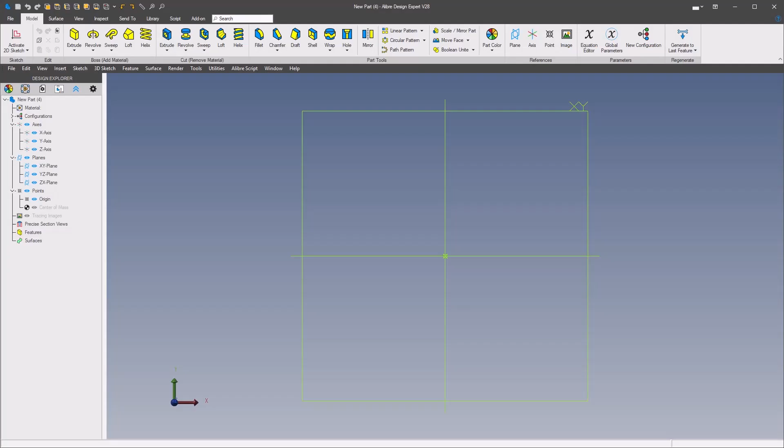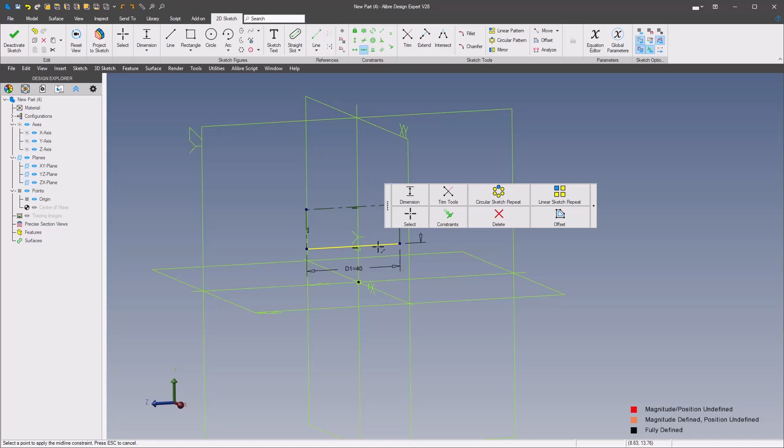We'll start a sketch on our YZ plane, and I'm going to start with a reference rectangle, 40 millimeters by 16 millimeters, and then put a midline constraint from the bottom line to the origin, and then go back in.

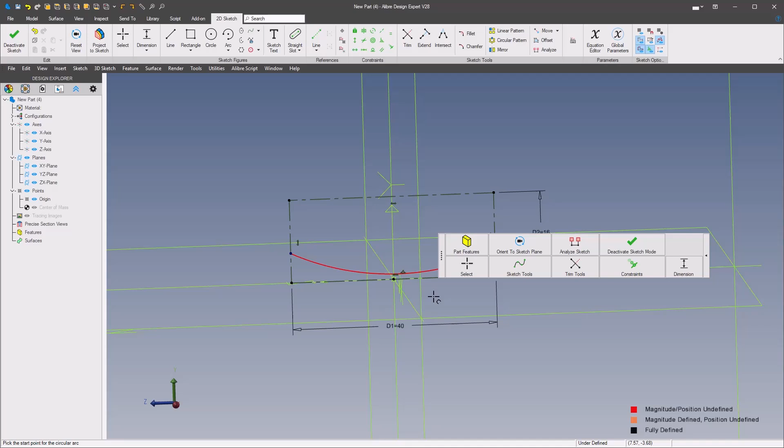We'll grab our 3-point arc and select from one side - make sure you try not to snap onto the midpoint - go to the other side and then just draw it down, and apply a tangent constraint from the arc to the bottom line, and finally a horizontal constraint between the two endpoints of the arc.

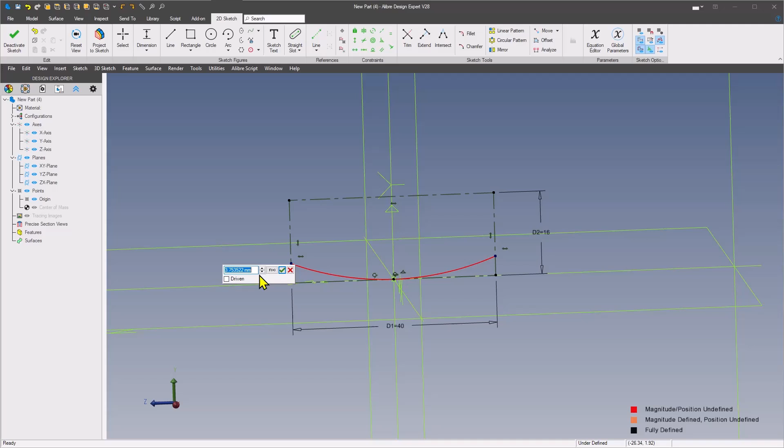And that's going to be dimensioned at 6 millimeters. Then finally go back in and grab our line tool, solid line, and just trace out around the rectangle to close that off and complete it.

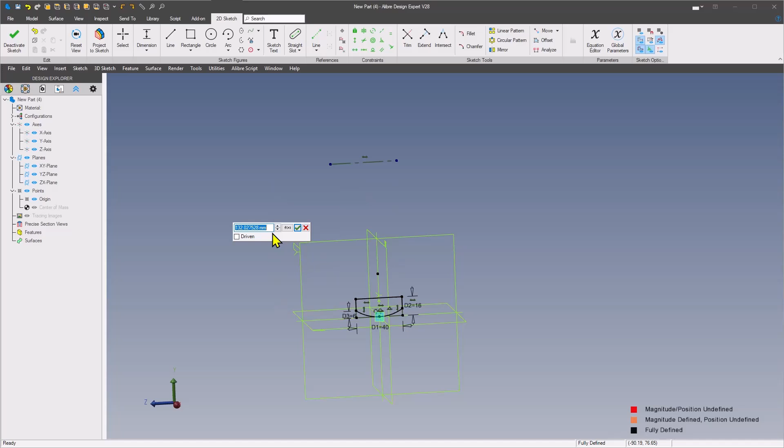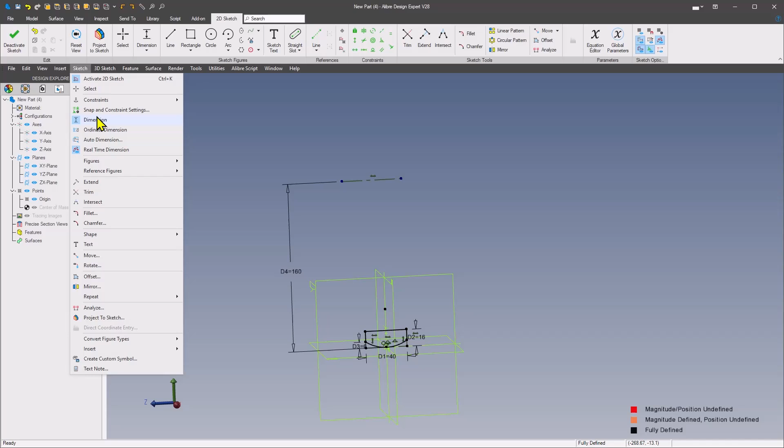Okay, so now there's two ways to add the arc or axis to revolve this. One is to draw a reference line and dimension this at 160, and then from your Insert Axis from Sketch ribbon - in your sketch tool, sketch ribbon - insert axis, select your arc or the reference line, click apply and OK that, and then deactivate the sketch.

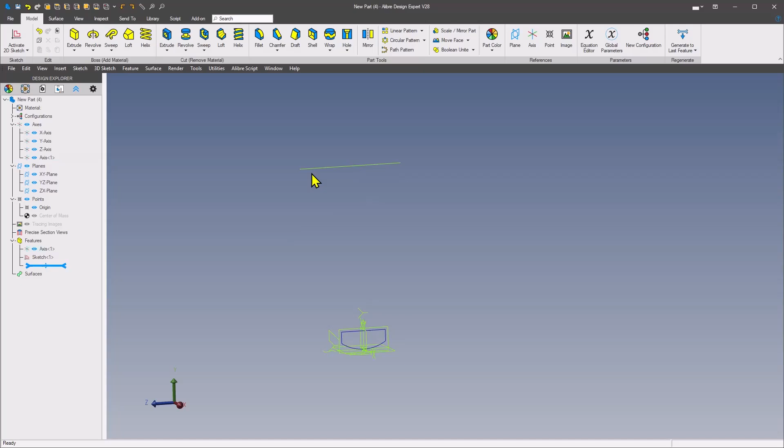So now we have our axis. Go back into revolve, select our sketch to revolve, select our axis, change this to mid-plane, and change our distance to our angle to 84 degrees, and that completes that.

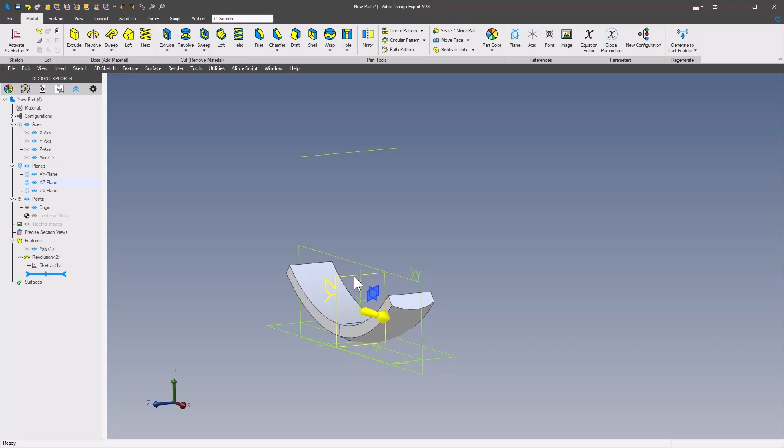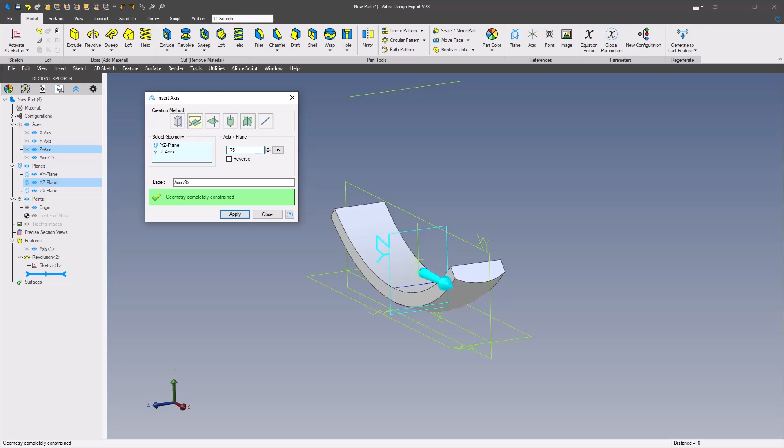Now, the other option for inserting this axis would have been to select the YZ plane, go to Insert Axis, or from the Insert menu go to Insert Axis, select the YZ plane, select the Z-axis, and key in your distance - I'll just key in 175. And if you need to, hit reverse, but that'll offset that on the plane, and click apply.

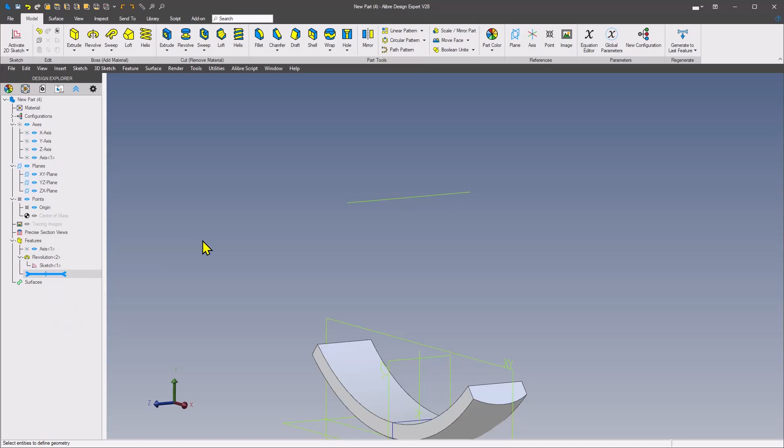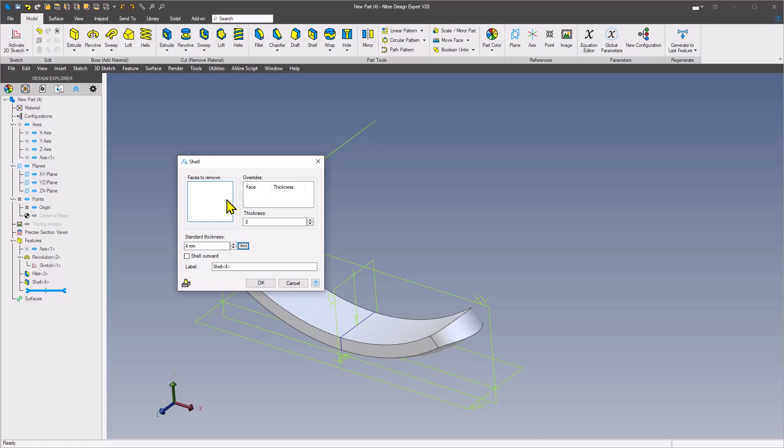So that would be your second option for inserting an axis. Let me just get rid of that one so we're not confused with it. Now we need to apply some fillets here. We'll do full round fillets at 20 millimeters, grabbing the verticals on each end. Then finally we do a shell of thickness 4 millimeters, removing the top face, and then we have basically our boat-shaped revolved part.

Next, we're going to create the circles or arcs to complete or define our sleeve here. That's going to be 40 millimeters, with an offset distance to give us a wall thickness of 6 millimeters for our steel pin.

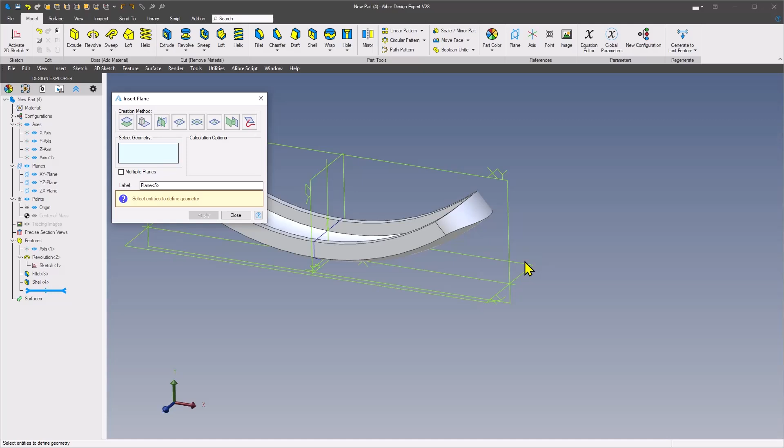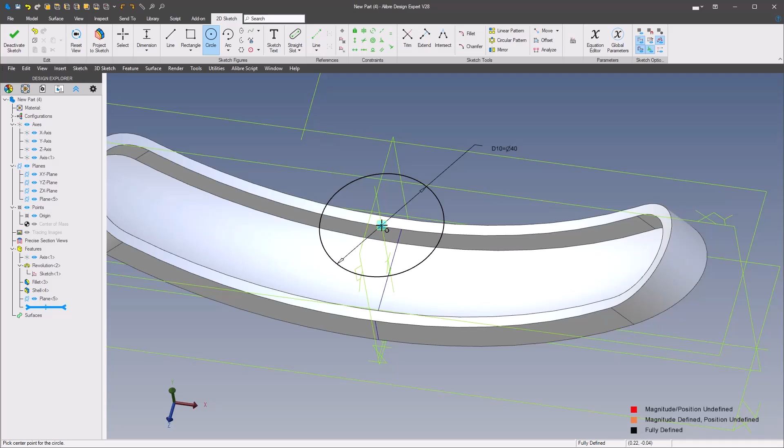So we'll first start by inserting a plane, and we'll offset our ZX plane by 40. Then on this offset plane, we're going to create our circles. First one will be 40, and then our second one - just select this origin and drag it out - and dimension between the two arcs.

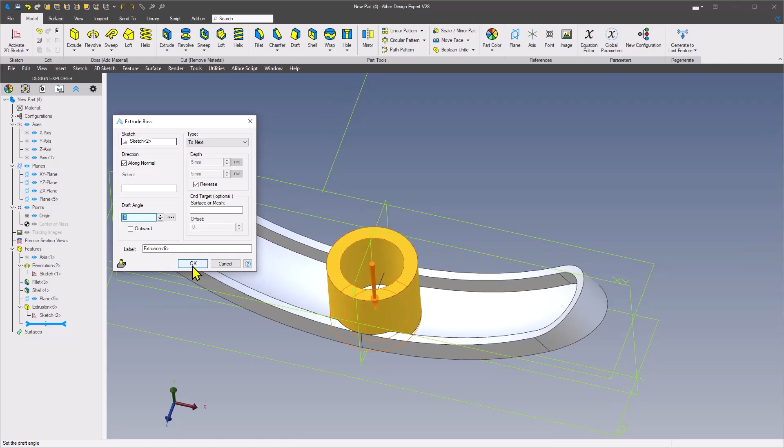6 millimeters for the wall thickness, and then we'll extrude, change our depth type to next, and if you need to, hit your reverse button to make sure you're going in the right direction, and that'll go down to the boat shape part. This completes our plastic part, except for material, which is ABS.

Okay, now let's go ahead and save this. We're just going to call this what's listed here. The ABS is part item number 1 on our parts list, so I'll change this as item 1.

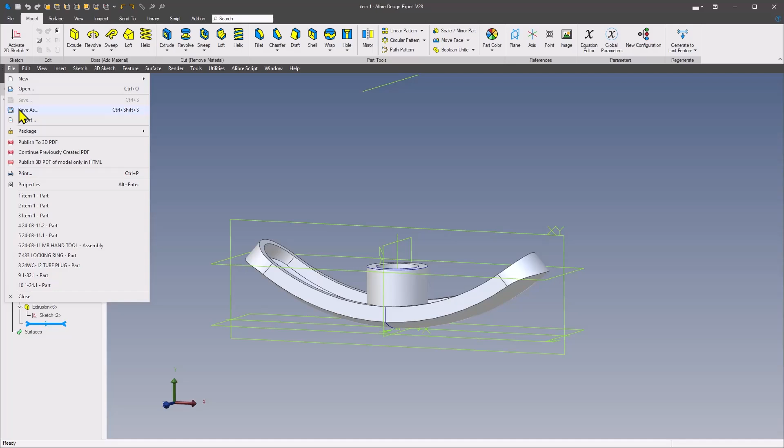Now we're going to reuse some of the same geometry to create our steel pin. So let's go in here, we'll do a file, save as, and change this to item 2.

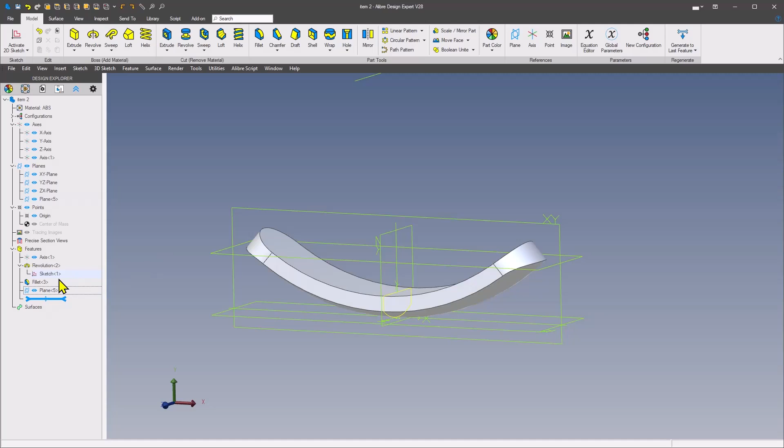Now, in order for us to reuse all this geometry, we're going to delete the extrusion, delete the sketch. We can leave the plane in here. We'll delete this shell, delete the fillets, and delete the revolution, but keep our sketch. So we're going to edit the sketch, and then I'm going to right click

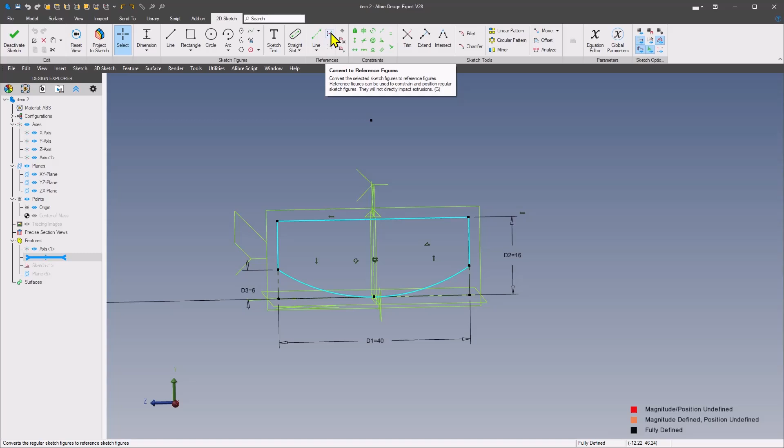on the arc and select chain select, and then from the ribbon convert to reference figures. Next we're going to come up and hit our offset tool, and we're going to offset 4 millimeters and select our arc and flip the direction to make sure it's offset to the inside. Then just to keep from having to add more dimensions, go to the constraints menu, select fixed constraint, and select the arc, and that locks that down.

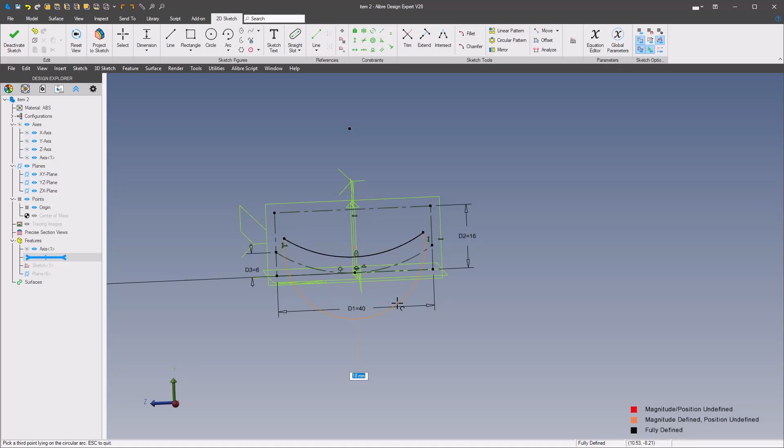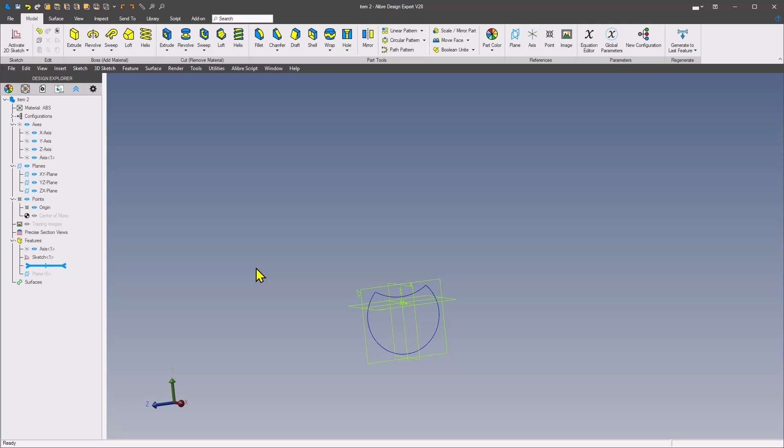Now one more thing we're going to do is go back in and grab our 3-point arc, select the 2 endpoints of the offset that we just locked down, and just drag down so that you get kind of a looping teardrop shape here. If you want, you can go ahead and lock this down too, so that that's fully constrained. So then we're done with that sketch. Now come down here and we're going to right click on our ZX plane, activate our sketch, and

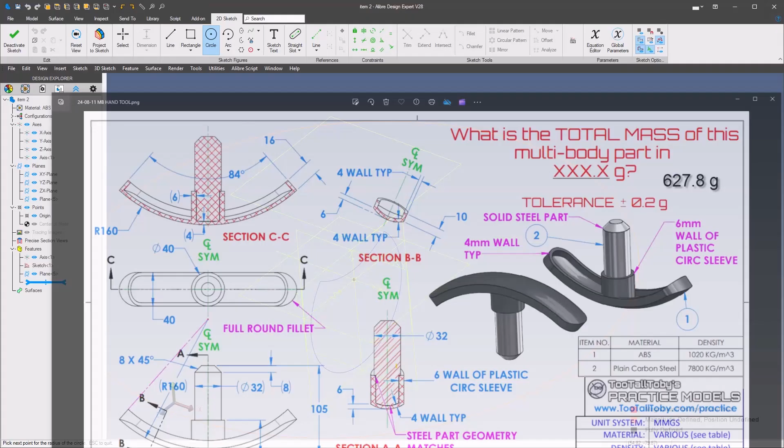we're going to draw a circle for our pin, and this is going to be the same size as the wall thickness here, so we're going to dimension this at 40 minus 12, which is our wall thickness all around. So 40 minus 12, and then we're going to extrude this for a distance. We're going to extrude that to a distance of 40. So key in 40, hit enter, and OK.

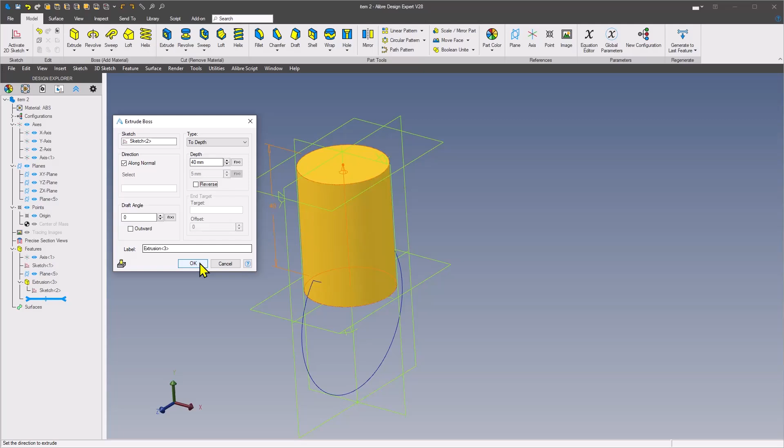You could have done that as up to geometry and selected this top plane too, it'd be the same thing. Okay, next is another arc. Activate our 2D sketch and draw a circle at 32.

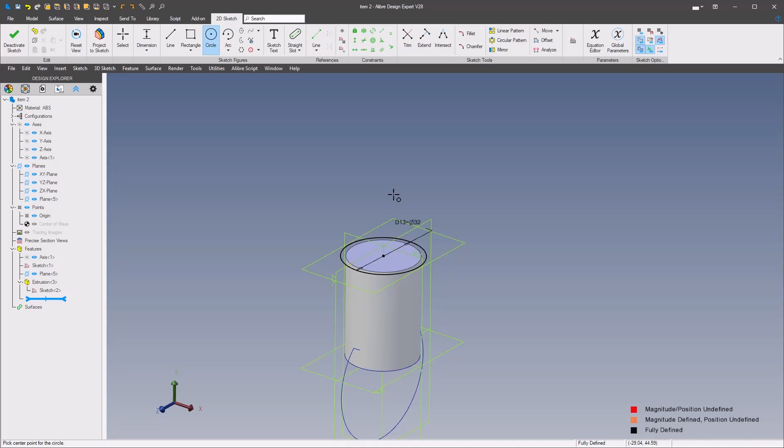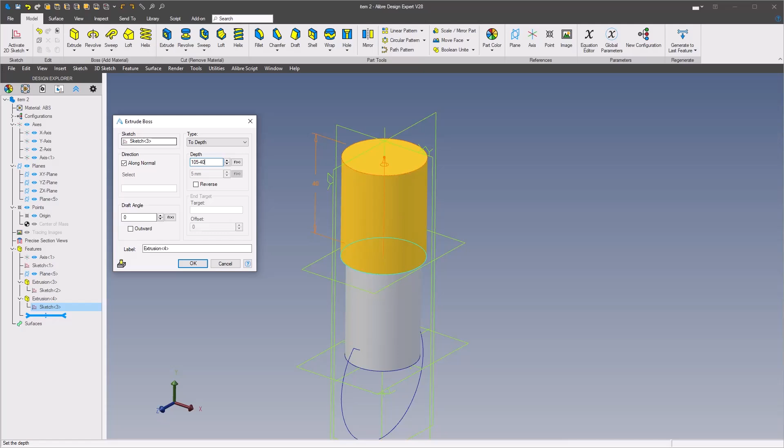And this one we're going to extrude. We're going to extrude this one to a depth of 105 minus 40. So up here we're going to go 105 minus 40, and OK that. If you want to double check that, we can just select the top face and the bottom face, and our readout here, distance in the bottom right corner, is 105.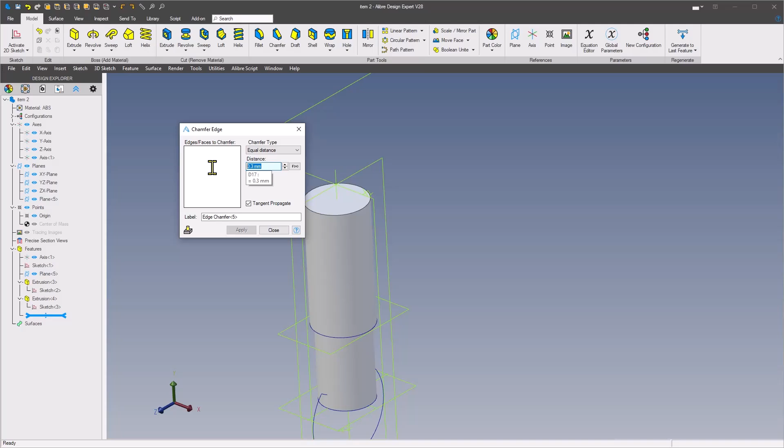So finally we did add a chamfer on here of 8 millimeters and select the top face and apply that. So that's done, and finish this.

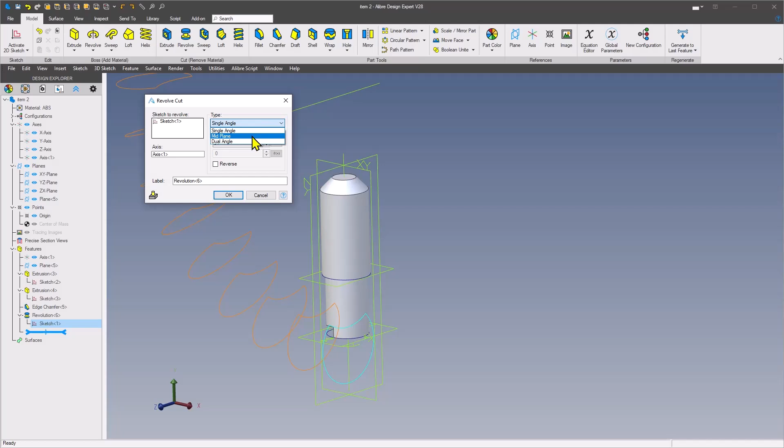As far as shaping it, we're going to do a revolve cut. Grab our modified sketch on the bottom, grab our axis, change our type to midplane. We're defaulting back to our 84 degrees from our original part. Accept that, and then we're done with that.

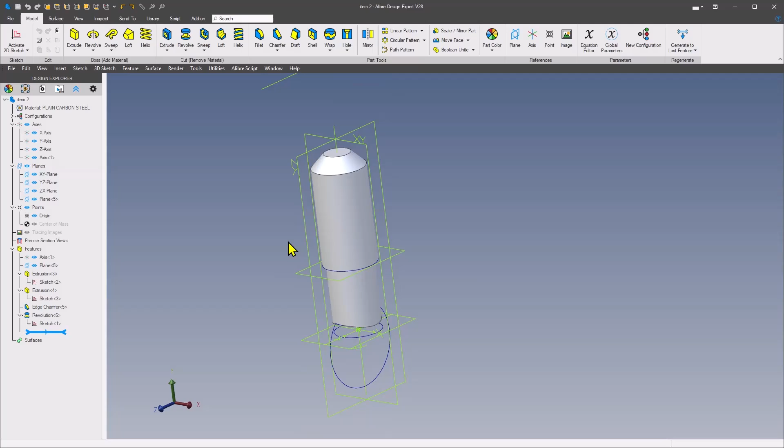And finally change our material to plain carbon steel, and finally save this, and we're done with our part. So now let me go ahead and close this, and we'll start a new assembly.

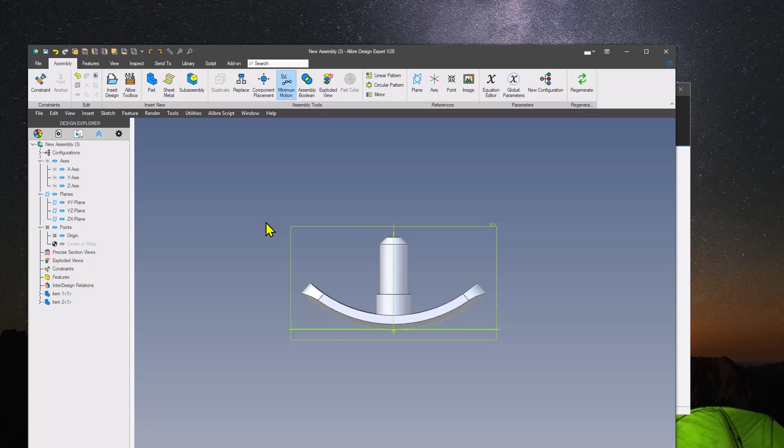Just grab all of our parts, and we'll just place them at the origin and finish, and get our windows squared away here. So now I just place them on the origin. Let me just do a right click. We'll insert a precise section view here, and we're going to section only the curved part.

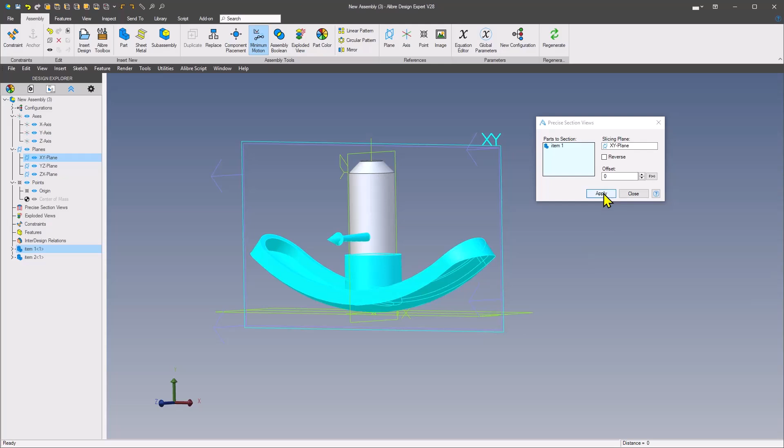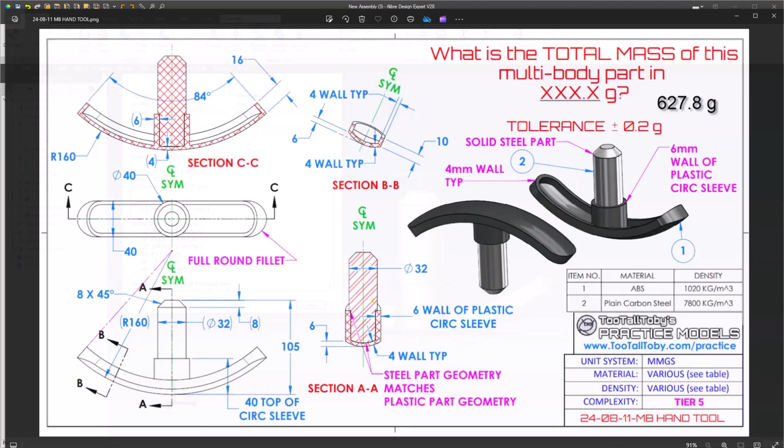And you can see that everything looks to be fitting in there nicely. As a final check, let's go in here, we'll get our physical properties, calculate that to one place, and we have 627.8 grams, which is what we required on our drawing.

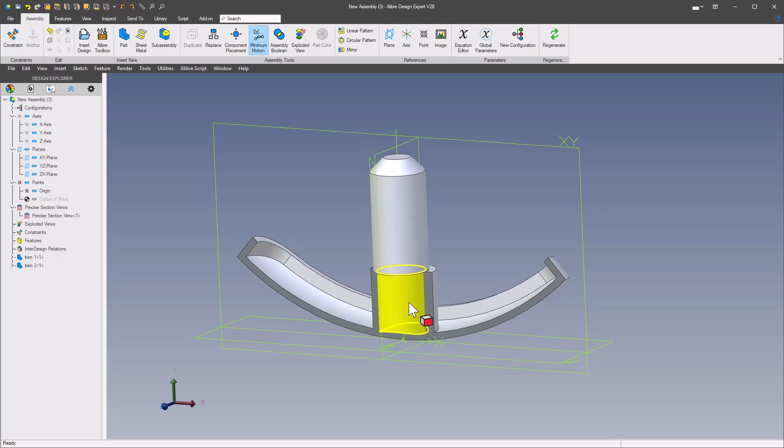So there you go. That's how you can reuse the geometry of one part to create a second part for fit up. You could have probably done this in the context of an assembly, but I tried this before and you cannot extrude this to a surface and have it come out right. This is a nice clean method, so hopefully this helps anyone practicing on this drawing.